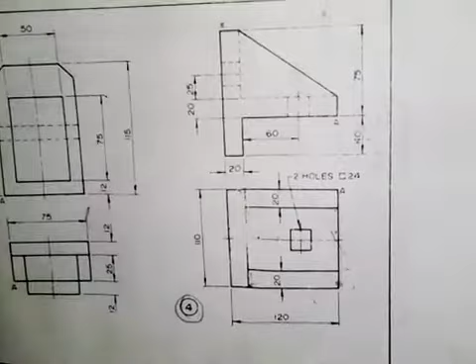And right now, what I want to do is show you how you can produce the isometric view of this object, as we are given the orthographic views here. These views are given in first angle projection. It means this is the front elevation and this is the plan.

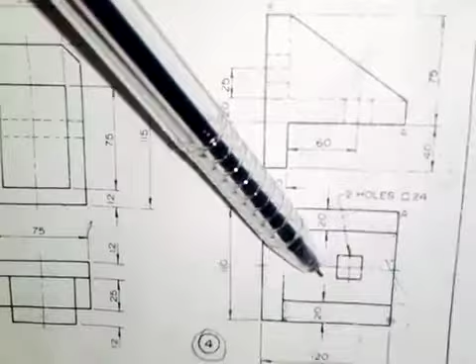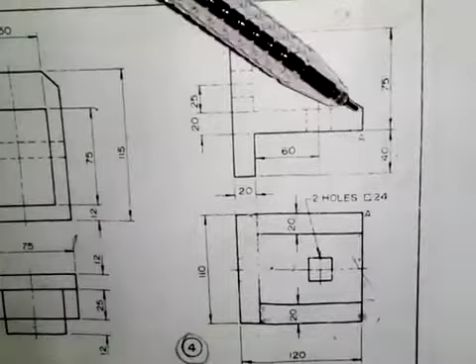Okay, so right now, as I said, this is the front elevation, this is the plan. So let's talk about the dimensions of the front elevation. Here the distance from here to here is 75 millimeters, distance from here to here is 40 millimeters, distance from the center line here to this point is 60 millimeters, from here to here is 20, from here to here is 25 millimeters. And the thickness of this is 20 millimeters.

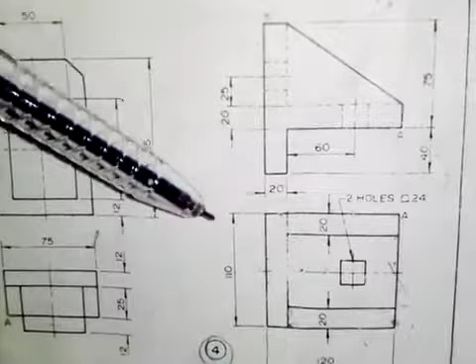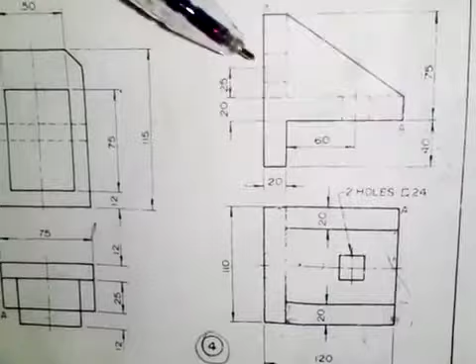And then we come to the plan. We have the distance from here to here is 120, from here to here is 110. The thickness of this is 20, thickness of this is 20. And most importantly, on the front elevation we have point A here, on the plan we have point A here, and we are told that this is a square. We have two holes, square, 24 millimeters. So they are talking about this hole, and there is also another hole here in the front elevation.

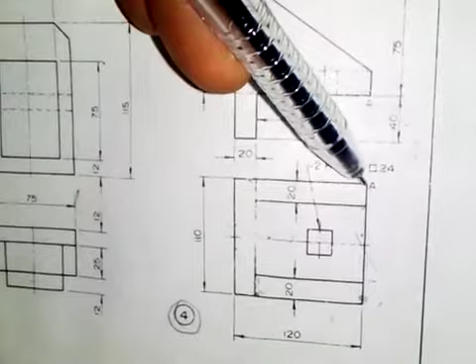Now what I want to say here, it is very important that you pay attention to where they give you point A. So here in the front elevation we have point A here, here in the plan we have point A here. We don't have it here, so we have it here. So how are we going to position this point A? That is the thing that we need to pay attention to.

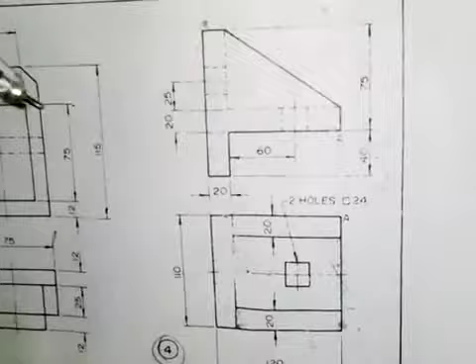But what I'm going to do with these views is that for the isometric view, I'm going to use half of these dimensions. That means I'm going to divide each of these dimensions by 2, and that is what I'm going to use to bring out the isometric view of this object. So let's go and see what we need to do. Very important, as I said, point A, we need to be very careful with that.

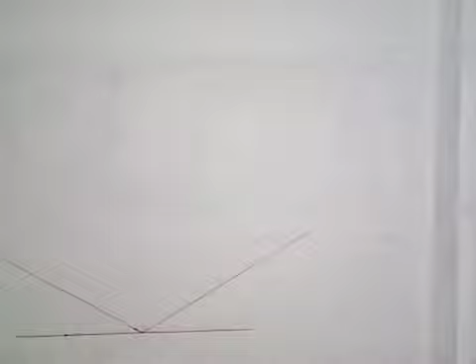So here I will draw a line in this direction. Then I'll take a line that goes in this direction, 30 degrees set square, and I will also produce a line in this direction. So now I have my point A here. This is where I have point A.

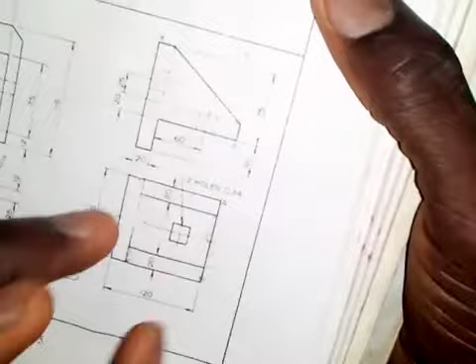So the next thing I want to do now is this. Point A is here, so if we put point A here, it's like I'm turning this thing. I will turn it and it comes up like this. Then point A will be able to rest here. So what I'm going to do first is that we are going to have a rectangle. Just look at what I'm going to do. You are going to understand it here.

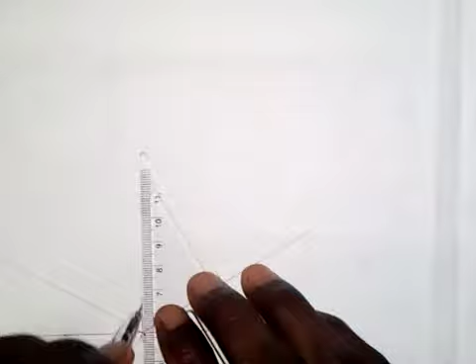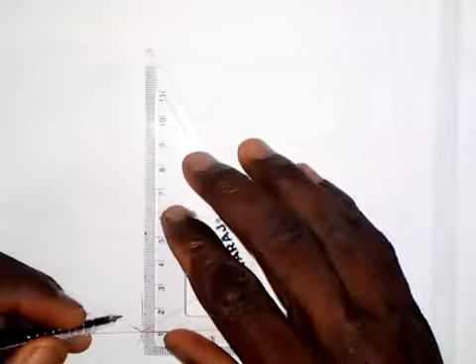So what you need to do here, I will draw a vertical line here, and look at what I want to do. I want to produce this rectangle. There's a rectangle here. The distance from here to here is 110. So I want to produce this rectangle, and the thickness is 20 millimeters from here to here. So instead of 20, as I said, I'm producing half. I will take 10 millimeters. So this is 10 millimeters here, and I will take this to the other side.

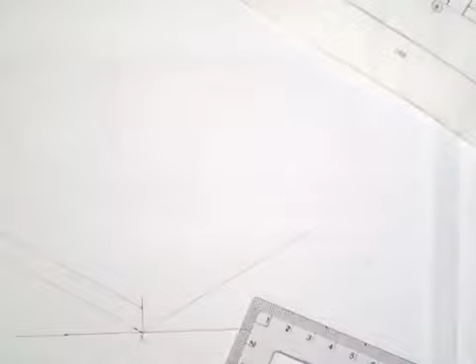You have to just study this work very well, because of where they position that A. Okay, so I'll draw this in this direction, and also we have that distance from here to here is 120. It means that the distance from this point down to this point is 120 millimeters. So instead of 120, I will take 60 millimeters. So this is 60.

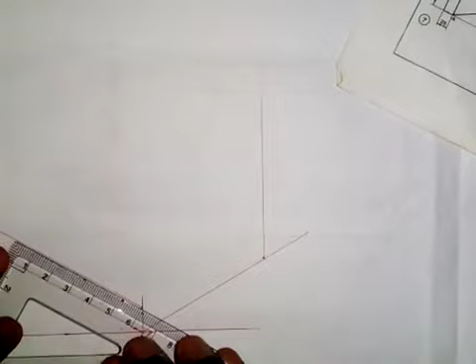This is 60 millimeters here. So at this point I'm going to draw a vertical line. So I'll draw a vertical line here like this. And then the distance on this side is 110 by 2, that is 55 millimeters. So I take a measurement of 55 millimeters here. So this is 55 millimeters.

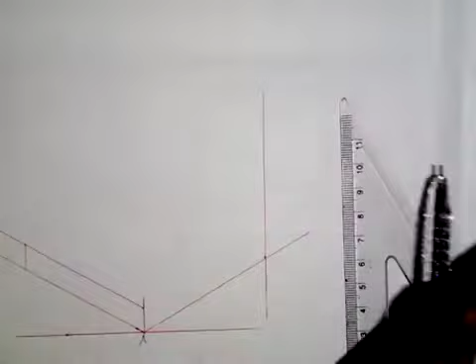So here I will draw a vertical line. This vertical line that I've drawn here, I have to bring it down for a purpose. I will show you the reason why I need to bring it down. Okay, so the next thing I'm going to do here is take a measurement of 20 millimeters from here to here, that is from this line which I've drawn here.

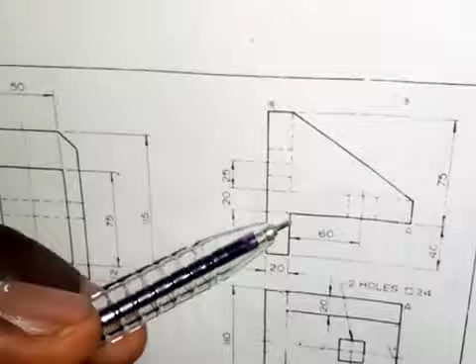So I will take a measurement of 20 millimeters, but we have that from here to here is 40 millimeters, as given here. So I will take 20 instead of that. So from this point, I will take 20 millimeters down. So this is 20 millimeters. So I will draw this line in this direction.

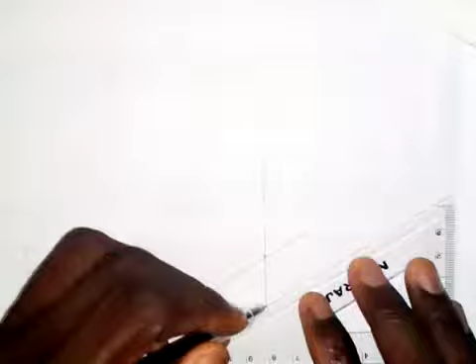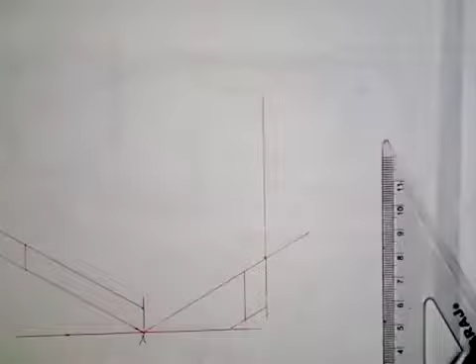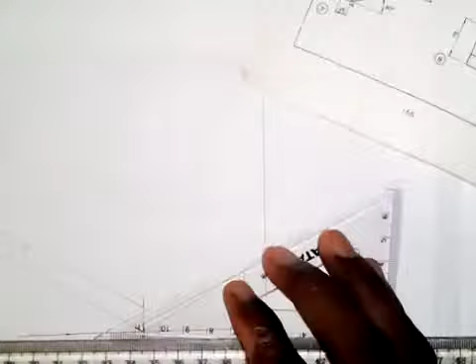Then I will take 10 millimeters from here. So here I will draw a vertical line. Alright, so for the vertical line that I've drawn, the next thing I'm going to do here: we have that the height from here to here is 75 millimeters. So instead of 75 millimeters, I'll produce this line partially to this side. So from here, I'll take this line to this side.

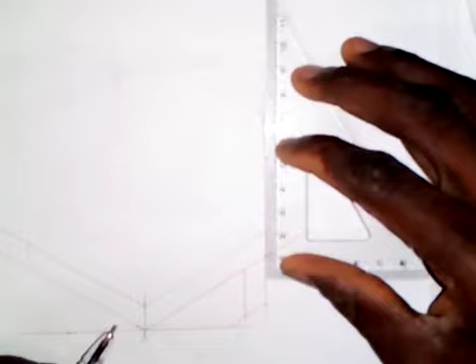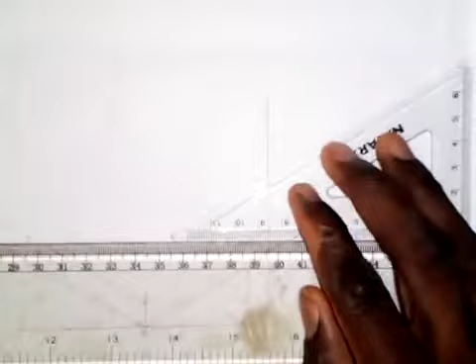Then as we have here, from this point, 75 by 2 will give us 37.5. So I will take a measurement of 37.5 millimeters. So this is 37.5. So here I will draw a line in this direction. So I will take this line and I will take it to this side like this.

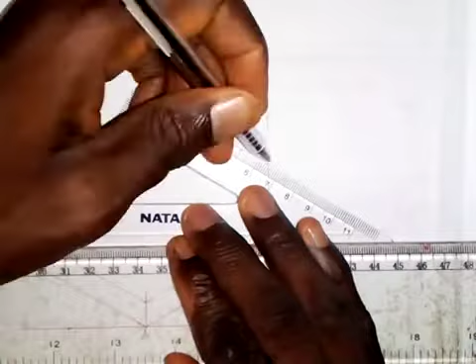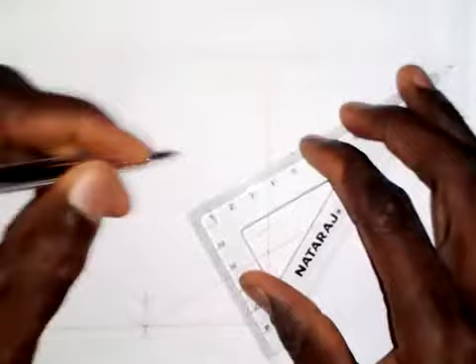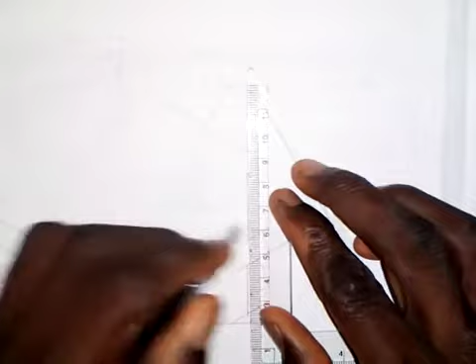Okay, so here we have that the thickness from here to here is also 20, but I'm taking 10. As I said, I'm drawing half, so I will take a measurement of 10 millimeters from here to here. So this is 10 millimeters. I'll project this down here, and I'm going to transfer this to the other side. So this goes here. Then from this point here, I will draw a line in this direction.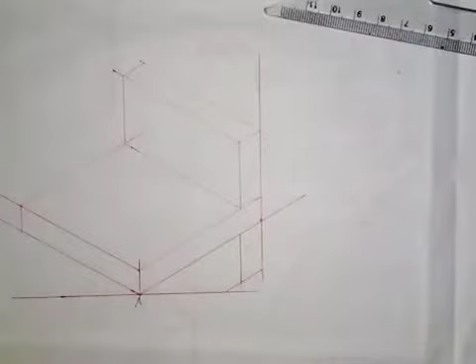Then I will take this to this side. Then I will draw a vertical line here. At this point, I will draw a vertical line. Then I will take this. I believe you can see what I'm doing. So I will take this to this side. Okay. So this is what we can see here now. So we are moving on.

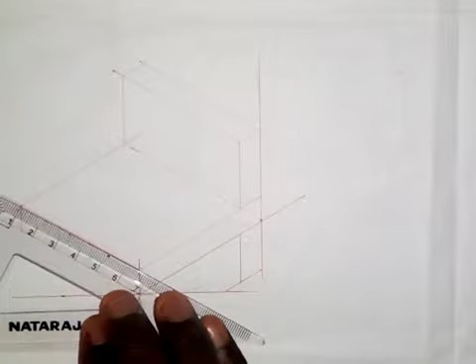Okay, so the next thing that I'm going to put here is a square hole at the center here. So we are going to put it around here. So these are 55 that I've taken. I have to divide that 55 into 2. So 55 by 2, that will give us 27.5. So this is 27.5 here.

So here I will transfer this to the other side, and get the center of this. Okay, so next I will also divide this into 2. So this is 60. Okay, let me check. Alright, sorry, I don't have to do that. We have that from the center here to this end is 60 millimeters. So instead of 60 millimeters, I'll just take 30 millimeters.

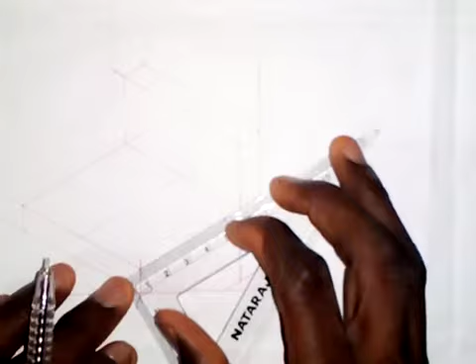So I'll take 30 millimeters from here. Okay, so it is from the back here that I will take 30. So this is 30 millimeters. So I'll transfer this.

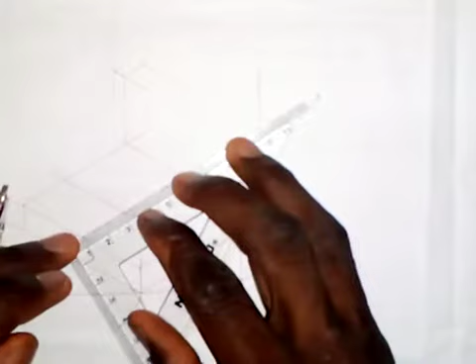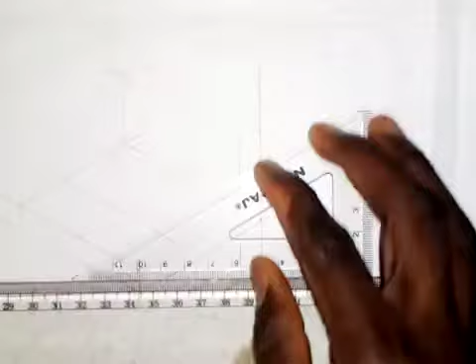So this is 6 millimeters. So here I will also take 6 millimeters here. So I will come here also and take 6 millimeters. So this is 6 millimeters and this is 6 millimeters here. So here I will form a square on this face like this. So I form a square on this face. Okay.

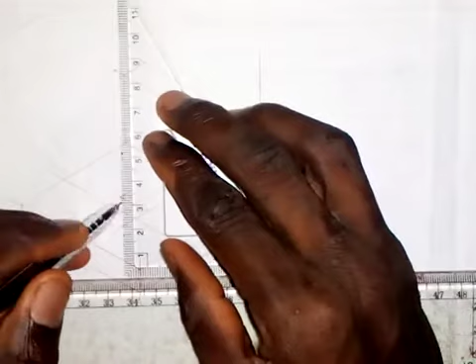So here I will draw this line and I will also draw this line. So I'll turn it to this side. I will draw this line. Okay. And here I'll draw this line. Okay. So from here I need to draw a vertical line to show that this is a square hole. So it comes like this. Okay, so this is how this part is going to look.

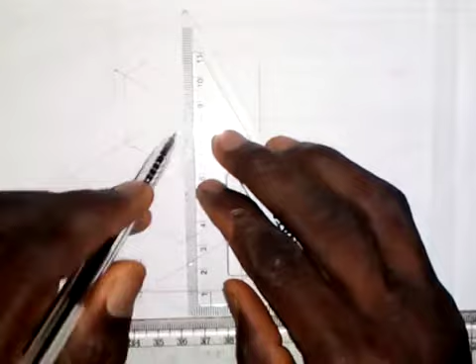And then we also have a square hole up here on this part. So I will also get the center. So I just need to transfer this to locate the center. So this is it. Okay, and then we are told that the distance of the center of this hole from this point is 25 millimeters. So I have to take 25 millimeters from here. So I take 25 millimeters from here.

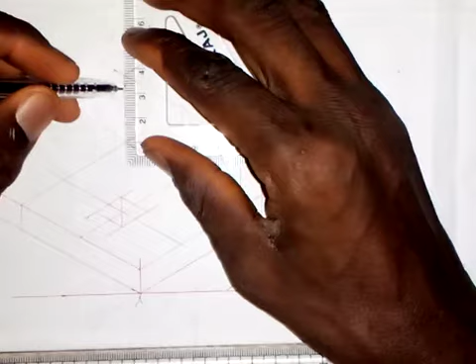So this is 25 millimeters. Okay, sorry, I'll be taking 12.5, not 25, because I said I'm using half size of the given dimensions. So here I will take 12.5. So this is 12 and 12.5. I have it here. I was looking at it.

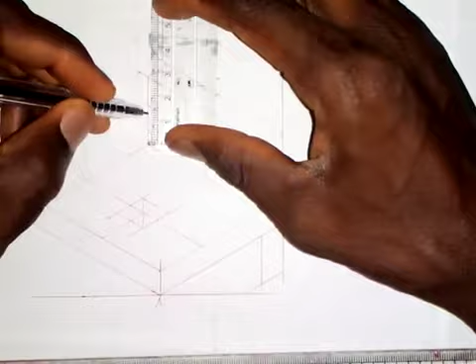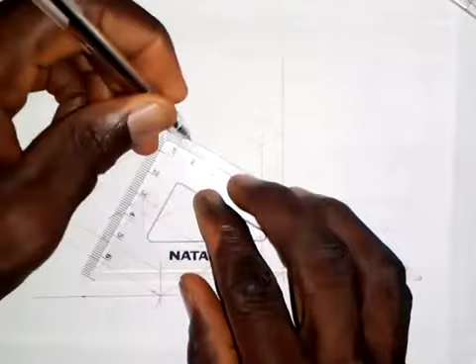So I'll just transfer this. So I'll transfer this to this side. I'll transfer this to the center here. Okay. So here I have this. Then I will take 6 millimeters here, and this is also 6 millimeters. So here I will take 6 millimeters down and 6 millimeters up. So I will form the square.

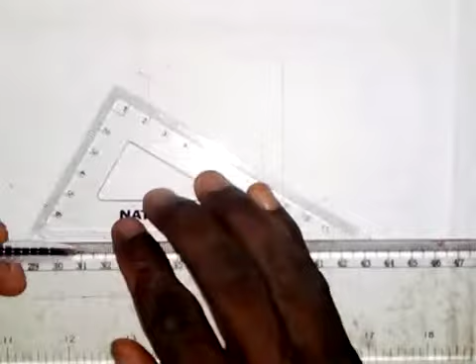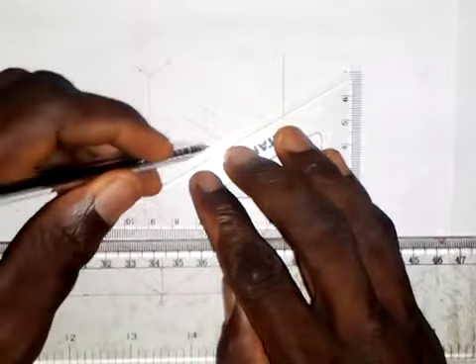I form the square. So just look at it, how it is going to look. So here we draw this line, and here we also draw this line. So here I will draw a vertical line like this, and here also I will draw a vertical line like this. Okay, so I should be able to see the hole, that this is a square hole. So I will draw this line in this direction. So I believe you can see what I've done there. So we are coming to bring out the shape, but let's move on.

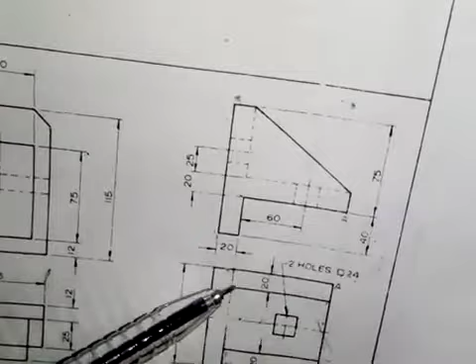And then the other things that we have to put here now, look at this thing that looks like a rectangle, and this part is hidden. It means when we produce this rectangle, we can't see there is a part inside that is hidden. I'm going to show you that. So we are going to produce this one. So they said it is 20 millimeters thick and it's on both sides. So one will be here and one will be here. And then it moves from here to here.

That means from this point we have to draw it to this side. So it's something simple that we are going to produce. So the thickness is 20. We are using what? We are using 10. So what I need to do is this. So I'll just come from here on this point here.

So I just take from this point, I will take 10 millimeters. So here also from this point, I will take 10 millimeters. It's something simple. Then you come down here, because the lines are non-isometric lines, so you need to take the dimension. You can't use your set square to produce it.

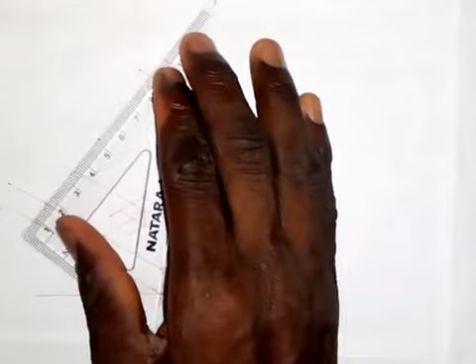So this is 10. So all I need to do now is that I will connect this point together with this. I will also connect this point together with this. So I will also do the same thing here. So connect this point together with this, and I will also connect this point together with this.

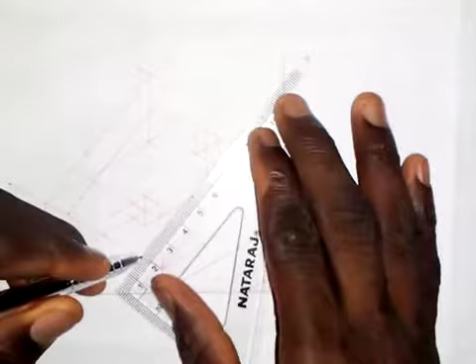Okay, now here on this part, because I can see this very well, this is blocked. This has blocked the inner side of it. So for this, I'm going to draw a line. I will draw a line from this point down to this point, and then I will connect this together like this.

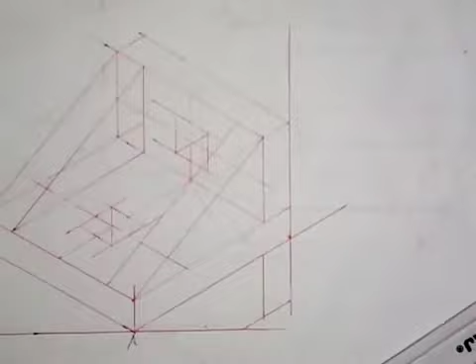So that is the part that is hidden from us. Here we cannot see that part. It is hidden from here to here. We can see it, but when we are looking at it from the direction, it will be hidden from us. So let's bring out the shape with thick continuous lines to bring out the outlines. We have a lot of things to bring out here. Okay, so let's see how it's going to look.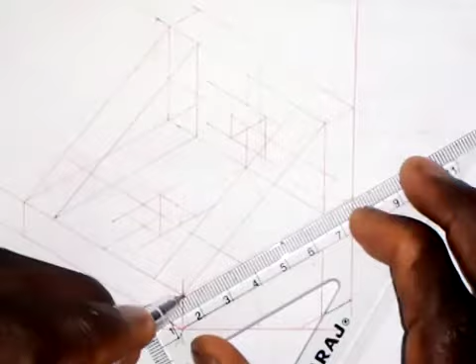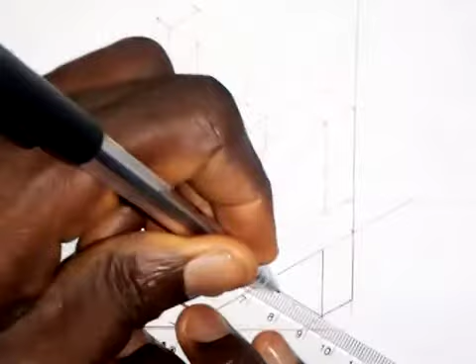So it's very simple. All we need to do is make this a thick line from here to here, and this is also a thick line from here to here. Then from here, I'm not going to make this a thick line, because we can't see it. And this also cannot be drawn with a thick line. I will show you that when I'm about to finish the work. All right, so there's a line here. I need to put it here like this. So this line makes it real now.

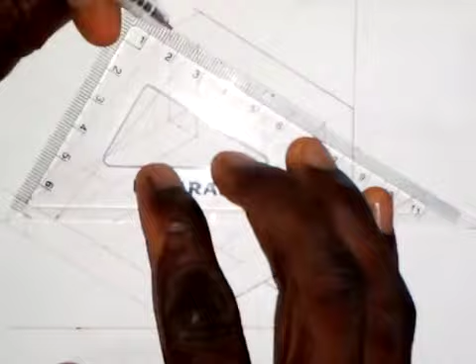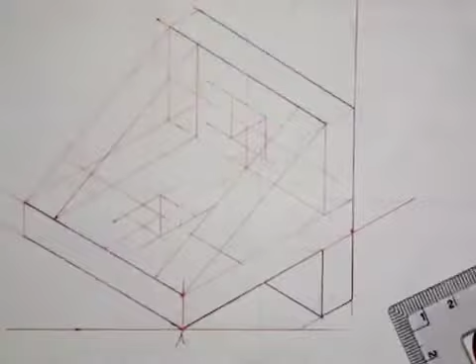So now this will be a thick line from here to here, and this will also be a thick line. So this is a thick line from here to here, and this is a thick line from here to here, and this is also a thick line from here to here. I believe you can see what we are trying to bring out here. So this is a thick line, and this is also a thick line from here to here.

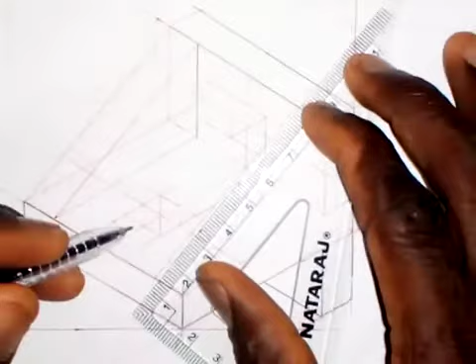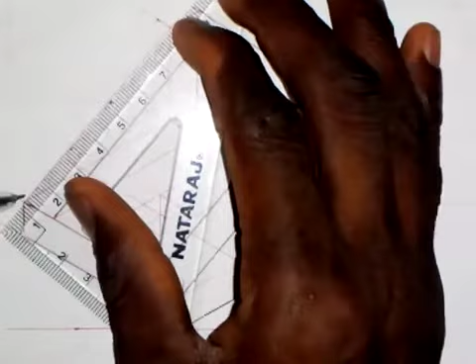Okay, so this line is a thick line here. So this line is a thick line, and this line also is a thick line from here to here. So this line is a thick line. This line is a thick line. This line also is a thick line, and there's a line here.

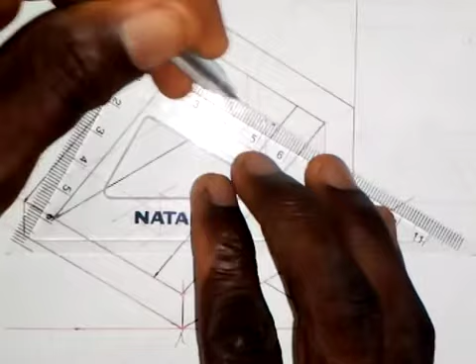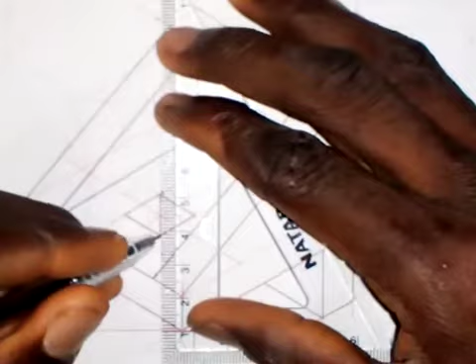Okay, for this square, I will draw this from here to here. I'll also draw this from here to here. So this line also, I need to make a thick line, and this also will be drawn with a thick line. So this line we draw from here to here to show that there's a square hole there. I believe you can see how it looks, and this line also is a thick line. So this line is a thick line.

All right, so this is how the object will look as we have here. This part is a plane surface. There's no line. We are not going to take any line around here, as you can see. So this is hidden. They show it hidden. That is the inner part that we cannot see here. It is shown hidden here. So this is how the object will look, and it's as simple as I've shown it here.

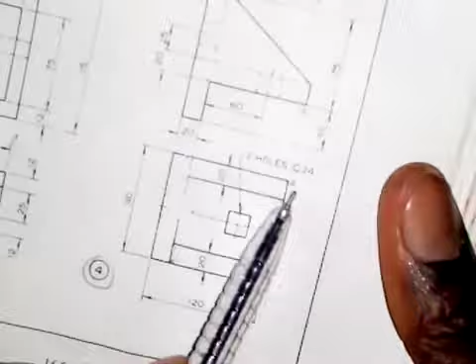All you need to do is to practice. This point A that we have here is this point. So if I turn this thing like this, this is what we have here. So this is point A. All you need to do is to practice it. When you practice it, you definitely master it.